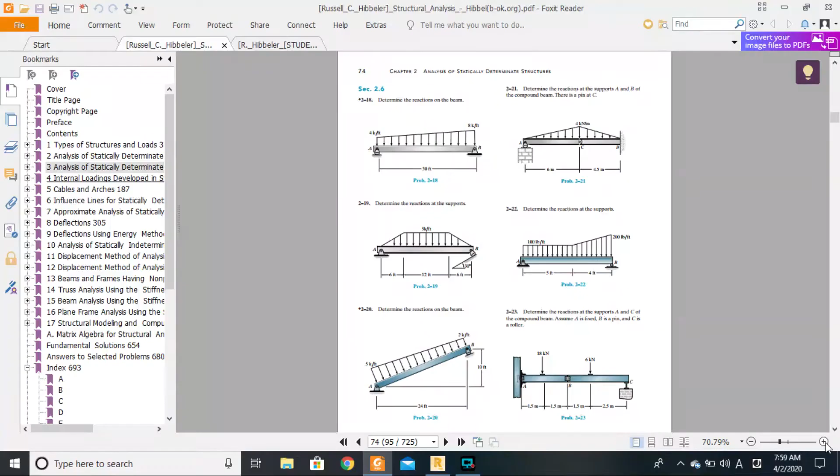Our choice for exercise 4 from our reference will be exercise 220, which is an inclined beam that is trapezoidally loaded, with 5 kips per feet as the largest load or P1, and 2 kips per feet as P2, with a horizontal span of 24 feet and a vertical span of 10 feet.

Here we have a normal pin support, and here we have a roller support perpendicular to the inclination of the bar, right? So this is what we want to solve right now. Let's go straight to Robot and do that.

Okay, so here we are. Obviously, again, it's the 2D structure, right? So we just need to click here on frame 2D to get started.

Hoping that the computer doesn't keep us for long.

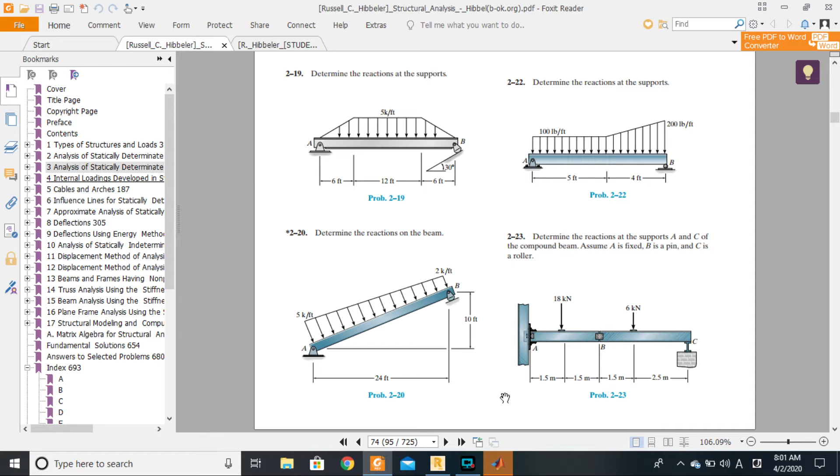Good, so it has come. We can go right ahead and continue.

So to model this beam, the very first thing we want to do is make sure that our units, as usual, are imperial. I'll go right ahead here to job preferences, and then under units and format, we'll click on imperial to make sure everything is cool. Good, we have that settled.

The next thing we want to do is draw our beam, but in order to draw our beam, we need to set the scale, right? So what I would like to use here actually is...

Let's go a little bit to something here. I would like us to change the theme, the theme we are using as our background, so that the grid points can somehow be more visible. At this level, I'm not seeing the grid points very well. I don't know if you do from the video, but I am not seeing it very well. So what I want to do is go to tools and preferences in order to set the desktop setting and choose a different theme that enables me to see the grid points very well.

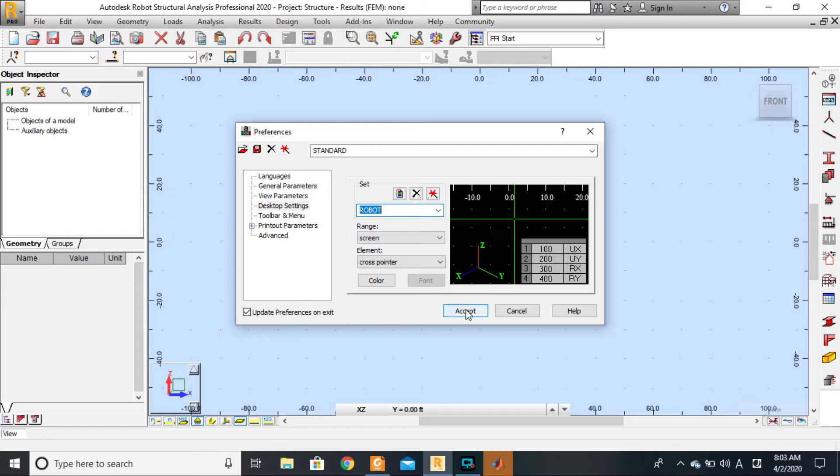I want to try a number of them here. No, I don't like that. No, okay, it's still not visible to me. Why not? Let's take this one just for a start, and then we'll come back to the default one later. I'll accept that.

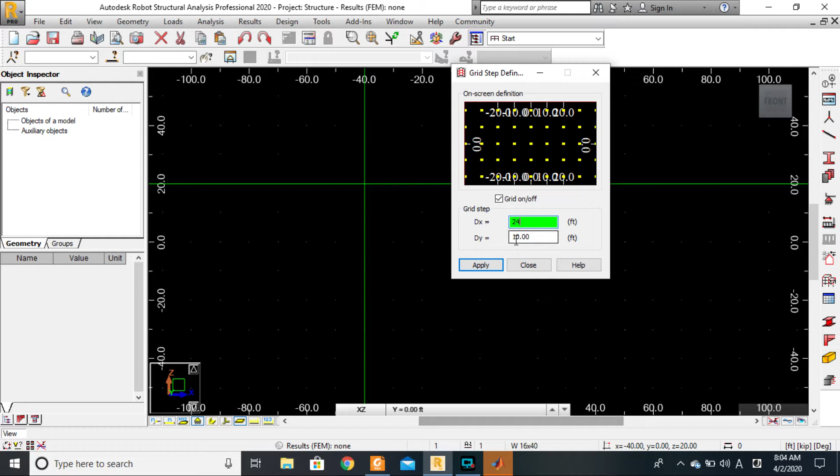Good, so those are our grid points, and you can see the way they are spaced. In order to draw this inclined bar, we need a spacing of 24 feet following the X and 10 feet following the Y. So I'll go right ahead and go to view and grid, and we'll go to grid step definition. Following the X, we'll just put 24 feet, and then following Y, we'll put the spacing to be 10, so that we can use any square of our grid to draw our inclined beam. I'll apply that and close.

So from 0 to here is 24, and then from, for example, 30 to here is 10, right? So it means I can connect any of these 2 points. If I connect here to here, I've drawn the beam, because the distance from this point to this point is 24, and the distance from this point to this point is 10 according to our grid. Good.

Let me zoom in a little bit. Let's take these 4 points so that we know this is our beam. I'll go ahead and click on the beam. In this case, the characteristics of the beam don't really matter. We are good to go. I'll click the first point, then go right ahead and click the second point, and that is our beam. So we can confirm that.

No, sorry, that was a mistake. Sorry about that. Come on, it's okay, we are there.

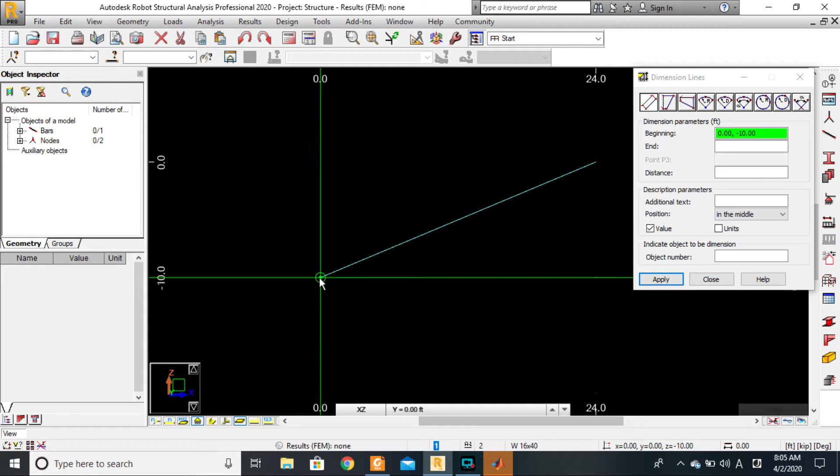We can confirm that by simply going to dimensions line here and measuring the distances. I want the distance from here to here. It gives us 24, right? Why all the stress? There's no need to stress that much. You can see it from here, 0 to 24, and here 0 to -10. The distance is 10, the distance is 24, as we've been seeing.

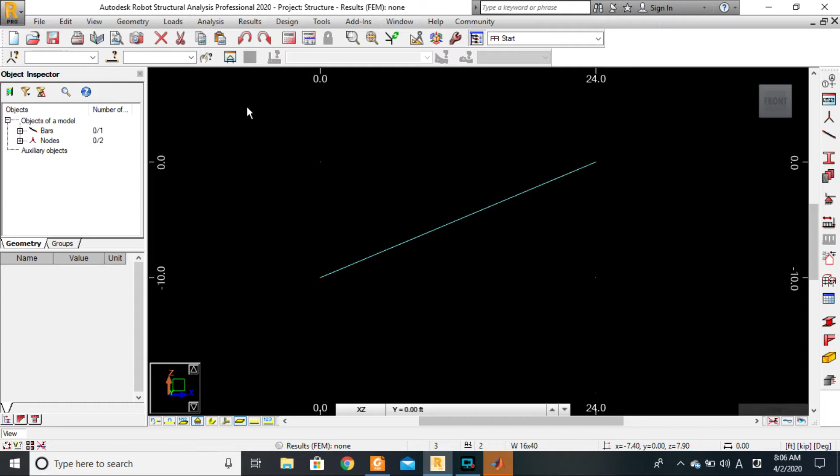That being said, the next thing we want to do now is put the supports first. For the supports, I think I'm not used to this theme - it was just necessary for me to draw that beam. So let's change the theme back to what it was. The blue, yeah, okay, accept. Good, so we are back. I like it this way, it's more interesting.

Good, so we'll click on support, and here we say we have a pin support. We have a pin support, so we'll choose our pin support and put it right here.

But here we have a different scenario. We have a support that is inclined at an angle perpendicular to the inclination of the bar. But this bar is defined by 2 points. So the very first thing we want to do is define the support in question. Let's just call it roller, and roller implies one direction that we want to block. Let's say UZ. Now we want that direction to be different.

The angle here we don't know, and we don't have time to measure angles. But we can choose the node here and take a reference node. For example, here the node number is number 1. If I put my mouse there, it has already written node 1 there as a reference node. Let me put node 1 there as a reference node, but then I'll explain what happens when you choose node 1 here as a reference node, because when you choose a particular reference node, you are already indicating the orientation of the support for any given other node you will choose.

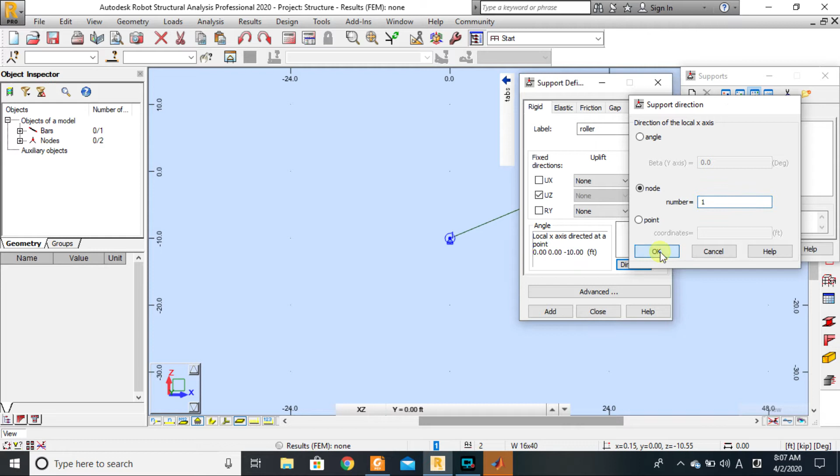Let me explain that. So we have, let me just add here, close. So this is our support here defined, it is roller. Now what happens? The direction of this support is with respect to node 1. What does that mean? It means that if I want to place this support, for example, at node 2, Robot will automatically calculate what is the inclination from node 1, which is the reference, to node 2. And then it will draw a support that is perpendicular to that orientation, as if it rotates the support to be perpendicular to that particular orientation. The rotation is done anti-clockwise.

So if I put the support here, you can see that's what happens. Robot, because our reference node in the definition of the roller support was node 1, calculates the perpendicular distance from node 1 to the node where I want to click and then places a support there. So just for you to understand, let's try it differently.

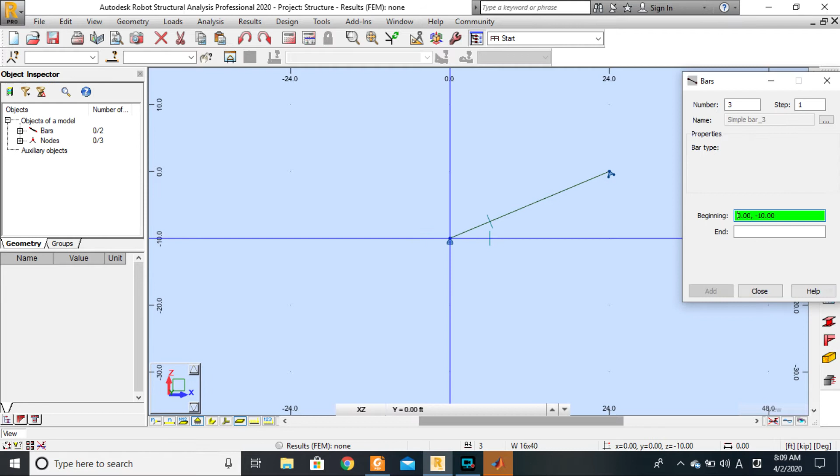If I have a different bar here, let's represent a different bar, for example, and I want to apply that very roller support - why not another bar again, just to illustrate this principle so you can get it clearly. If I go right ahead and apply the roller support here, for example, how do you think it will be? It will be vertical, right? Because we have said UZ, and UZ here will calculate the orientation from 1 to 3, which is horizontal, right?

So it wants to put the support perpendicular to this horizontal inclination, which will be vertical, as you can see here. For this one, how will it be? This is the direction. The reference here is node 1, right? And when I click here, that is the way the support will be perpendicular to this beam.

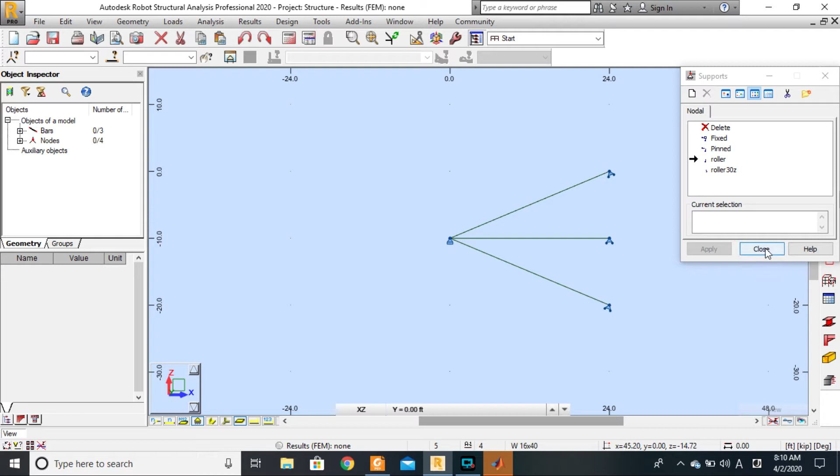I hope that explanation is clear. It will help you a lot to understand this the way I have explained. That being said, we don't need all of this. It's not part of our structure, so this is our focus here.

The next thing we want to do is to put a trapezoidal load, right? As we can see, the load here is also perpendicular to the inclination of the beam, or perpendicular to the neutral axis of the beam, right?

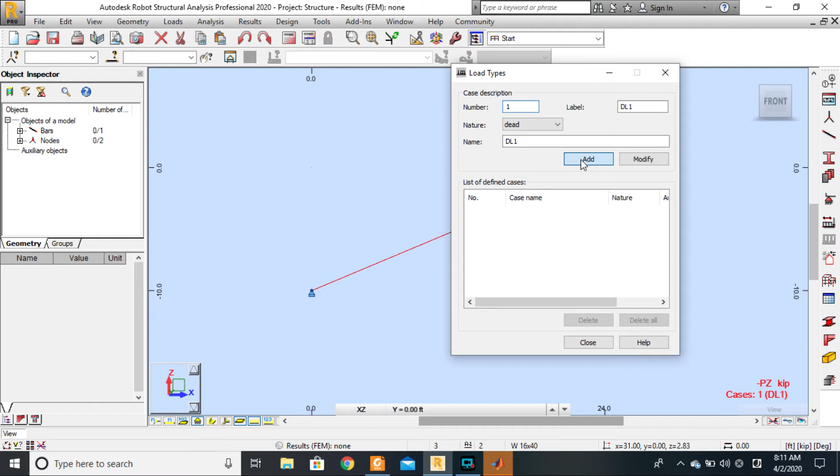So what we will do is go right ahead and first define the load. We'll add that. That's done. Now we want to add the trapezoidal load, so we'll come right here to Bar and click on Trapezoidal Load.

So for the trapezoidal load, what's our value for P1? Our value for P1 is 5 kips per feet, so we want it here to be 5. Our value for P2, I think, is 2, right? If we maintain the absolute distance, yes, it actually goes from 0 to 1. Perfect, right? So what do we want to do? We want to add this.

You can see here that it is in the global coordinate system, and it is oriented towards Z. But we want it negative, right? We want -5 here and -2 so that it will point downwards and not upwards, okay?

But is that orientation correct? Let me show you. It won't actually be correct, okay? The orientation won't be correct.

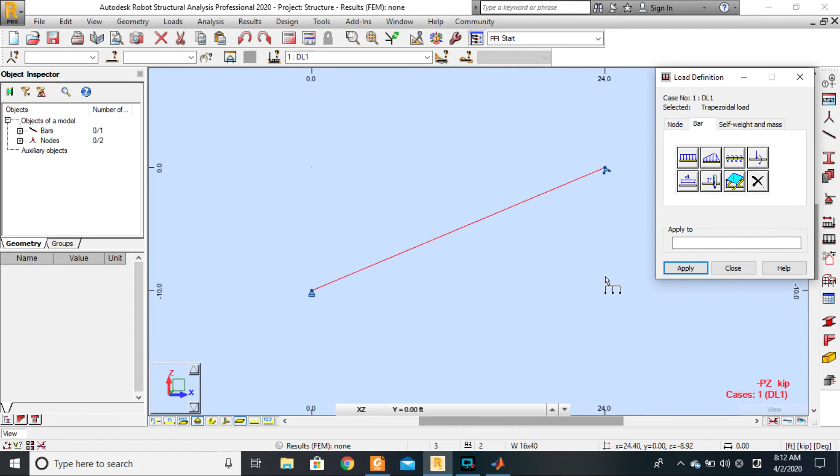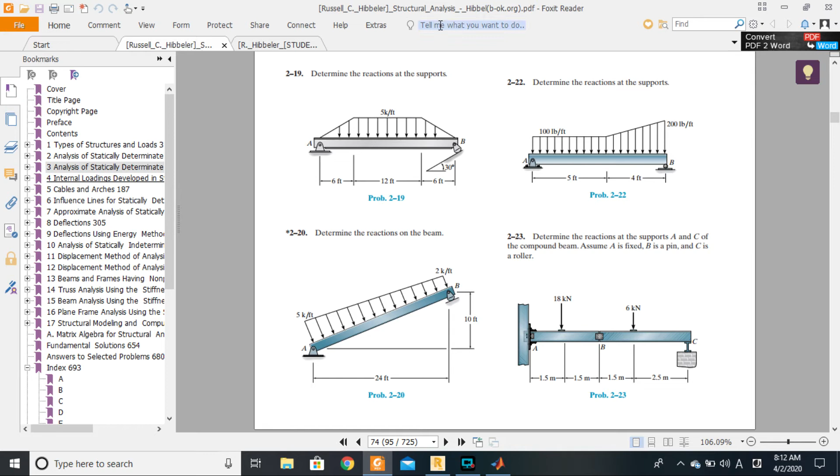Let me show you. So if I add this and apply it to this particular beam, look at the way the loads are. They are straight forward down, but they are not perpendicular to the inclination of the beam. I want to show you the difference here. Maybe I should put this one way and maintain the other way just for your appraisal, just for you to see. Are you seeing that this is in the direction of Z, and this is perpendicular to the neutral axis here? So this is not the way we have to represent that load.

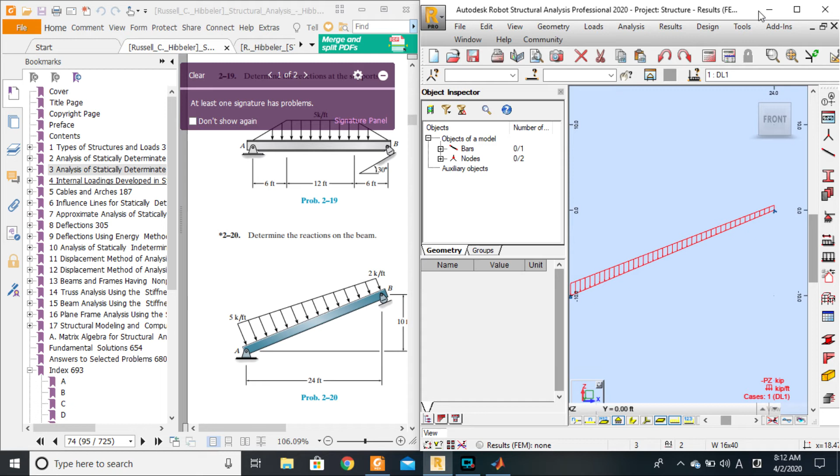So that causes us to introduce a new concept, because we don't have time to be calculating the angle of inclination of this with respect to that in order to put the load properly. We don't have time for all that right now.

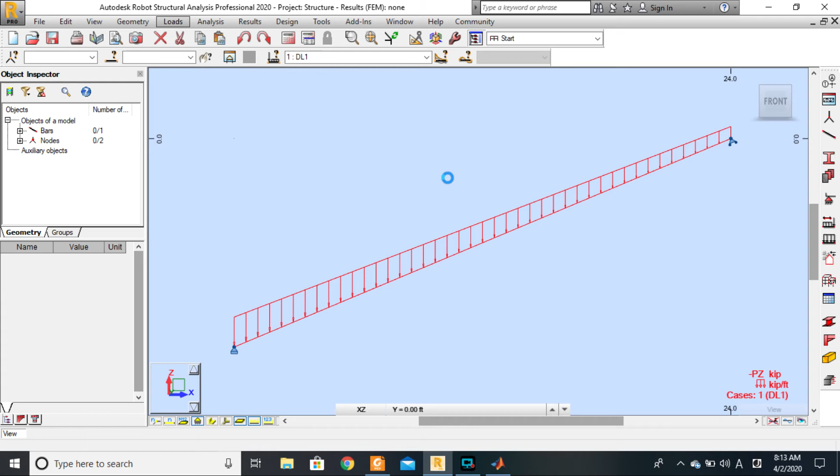We want to introduce a different concept. But before that, let me delete this load. Can I just press Control? No, let me not take the risk. So we just go to load table, and we'll take advantage to delete the self weight that Robot automatically adds when you select a particular load definition type. We'll delete that by pressing Control X. Good, and we are good to go.

Okay, all the loads have been deleted. Now we can work. I'll just come right here to load definition, and under Bar we'll take a trapezoidal load. The difference here is that we'll be using the local coordinate system, not the global coordinate system.

So we have two coordinate systems here. The global coordinate system is the system for the overall structure, whatsoever structure that you will model. This is the reference, the global reference for that structure. Z will always be in this direction, X will always be in this direction, Y inside, irrespective of the element that you draw.

Now, the local coordinate system, as the word says local, is a coordinate system that is by element, per element. It does not belong to all of the structure; each element has its own local coordinate system. In Robot, and this is a principle of the finite element method, the local coordinate systems of bars are such that the x-axis is always in the direction of the neutral axis, and the z-axis, in the case of this 2D, will be perpendicular to that direction.

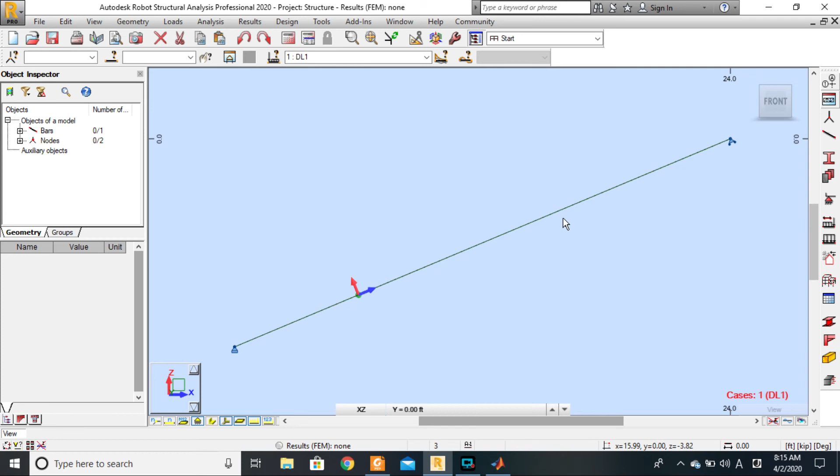Exactly, I hope that's understood. So if I go back to the bar here, I have to choose local, okay? Maintain it to negative, negative, as you can see, so that it can be opposite to this direction but applied on the load.

And then I can add this load and come right here and apply that. Once that's done, you can tell the difference, right? So it is now perpendicular... perpendicular, I don't know what I wanted to say.

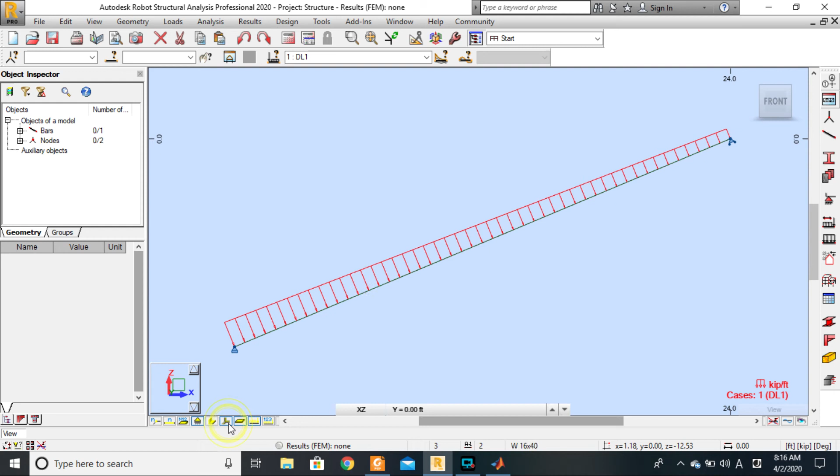Okay good, so we have the loading there, we can see the loads. That is it, from -5 to -2.

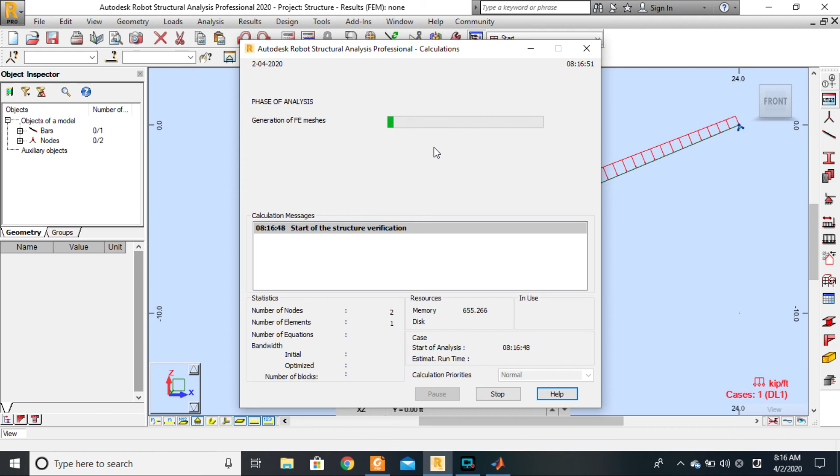I think everything is set and we are good to go for the calculation to calculate the reactions, right? So I'll go right ahead here and click on calculate. Let's go ahead, let's go ahead. Okay, zero errors, zero warnings.

I like that, it's perfect. So now let's check the reactions. We'll go to results, then diagrams for bars, and go ahead and activate the reactions.

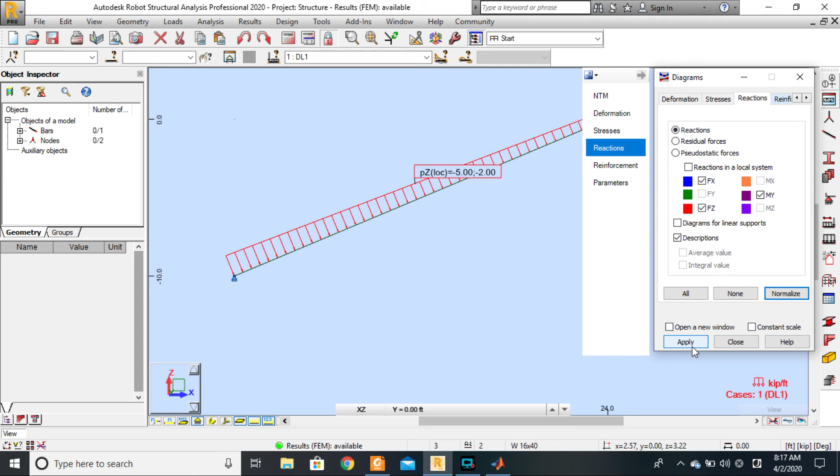Just show me all the reactions. Apply and close. So what are the reactions here? We have 20 and 48 for the pin support down here, and here we have 15 and 36.

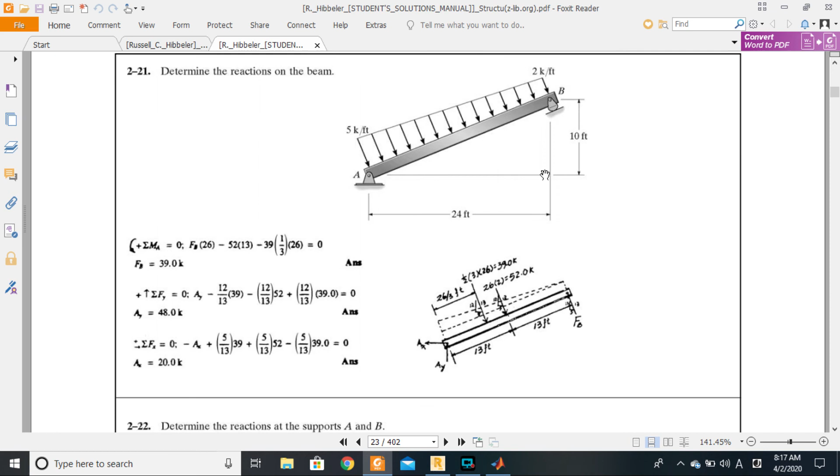So let's check that out. Unfortunately, in this document, the answers don't have the answer to this particular exercise, but I have the marking guide. So the marking guide here, this is the exercise, and we can see the answers right here.

At the level of FB, we have 39 kips, okay? It is the 39 that is oriented in this specific direction. So we can calculate the components to determine what we are having here.

If it's correct, we can get the cosine to see whether it corresponds to 15 or 36, and we can also get the sine to see whether it corresponds to that. So for that, we can just go here. You will see that we have 24 feet this way and 10 feet this way, right?

So 24 and 10 will give us a hypotenuse of 26. If you do the square root of 24 squared plus 10 squared, it gives you 26, okay? So to get the sine of the angle of inclination here, it will be sine equals opposite divided by hypotenuse, so it will just be 10 divided by 26.

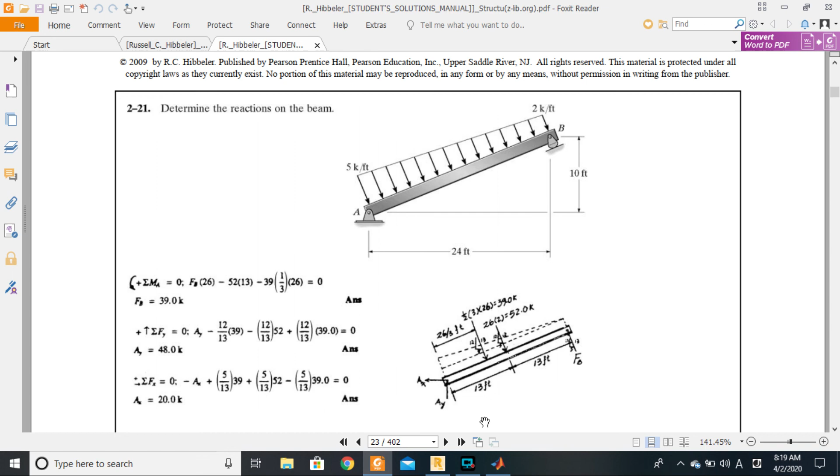So if we do 10 over 26 times 39, it should give us one of our answers if what we did is correct. Let's do that: 39 times 10 divided by 26. It should give us 15. Are you seeing that? This is our 15 right here.

And then the other one: 39 times 24 divided by 26 should give us 36, right? Which is the other answer we are having right here. Good.

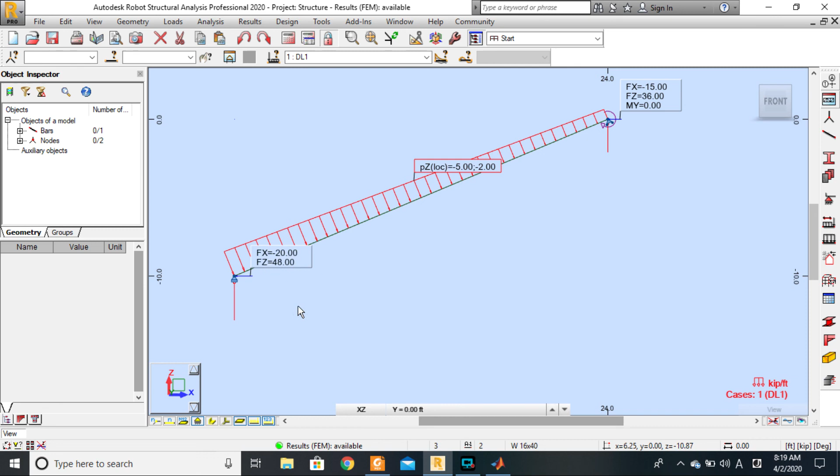So what about the negative 20 and 48 at the level of x? Here we have 20 and 48. It depends on how they oriented there. As you can see here, the x-axis here is oriented opposite, so it's normal that it should be negative 20, since our own positive direction is in this direction. So it's exactly the same answer.

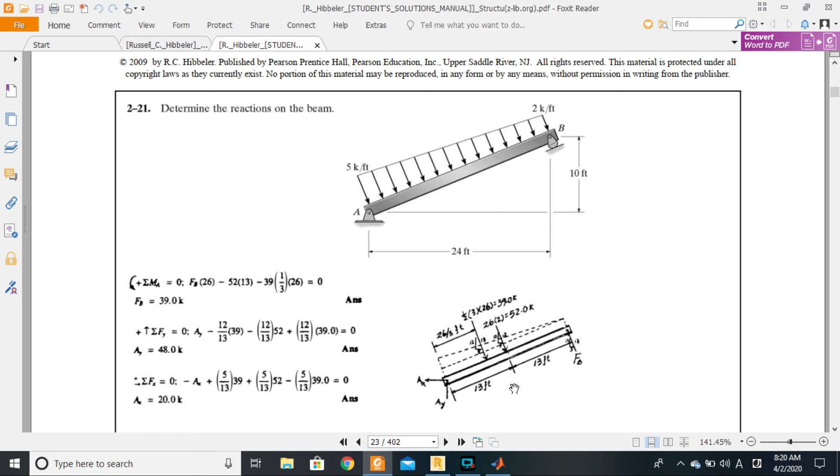Okay, so I think that does it for exercise 4. I hope you learned a lot, and see you guys in the next exercise.